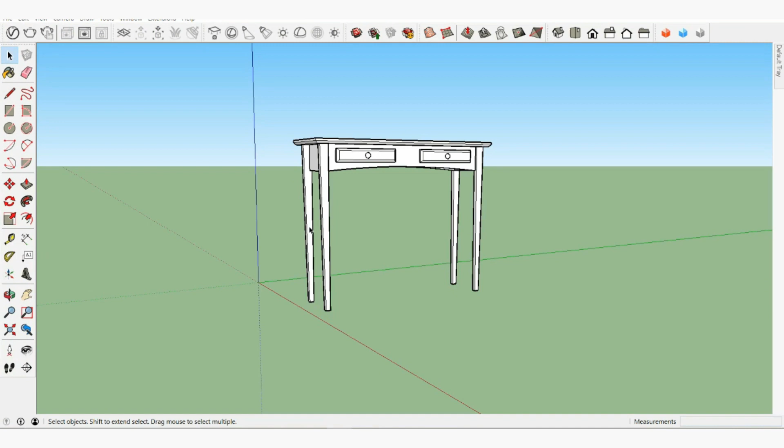In this video, we'll create a hallway table. We'll learn about using groups and components to better separate and organize the various parts of your model.

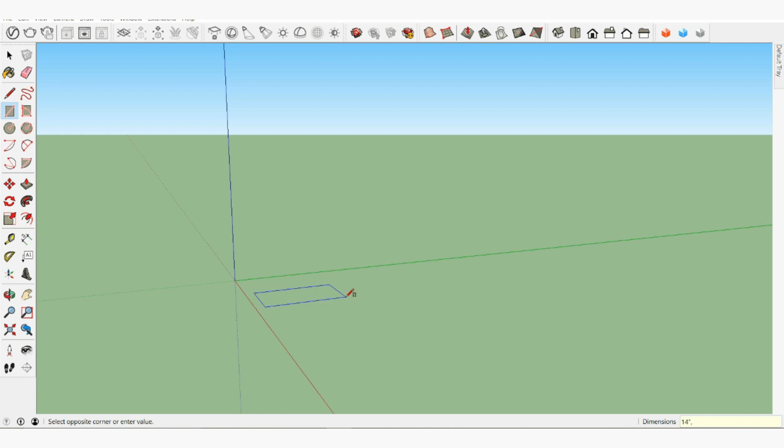We'll start by drawing the tabletop. Create a rectangle that is 14 inches wide by 48 inches long and push-pull it up 1 inch.

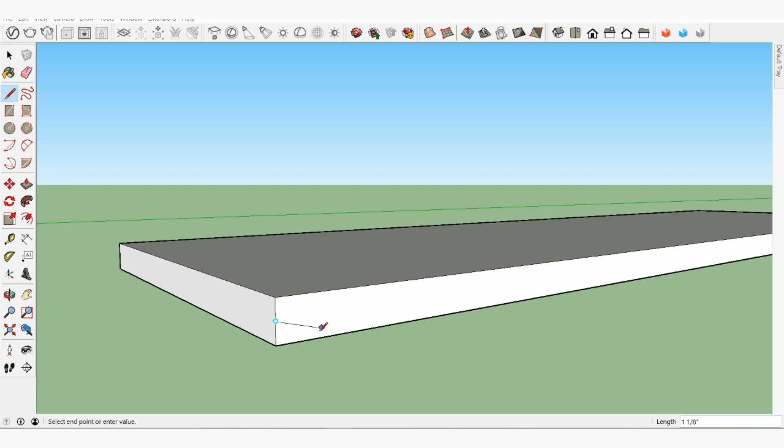Now zoom into the corner and draw a line from this midpoint to a point on the lower edge. Depending on your preference, you can make this angle deeper or more shallow, and SketchUp will give you an indication of an equidistant angle by turning purple and snapping to that angle.

Finish your line and orbit underneath the tabletop. We are going to use the follow me tool to create a chamfer. We could manually follow the surface around the edges, but there is a quicker method. Because we want to chamfer the entire lower surface, we can pre-select that surface, then pick the follow me tool and click on our angle to finish.

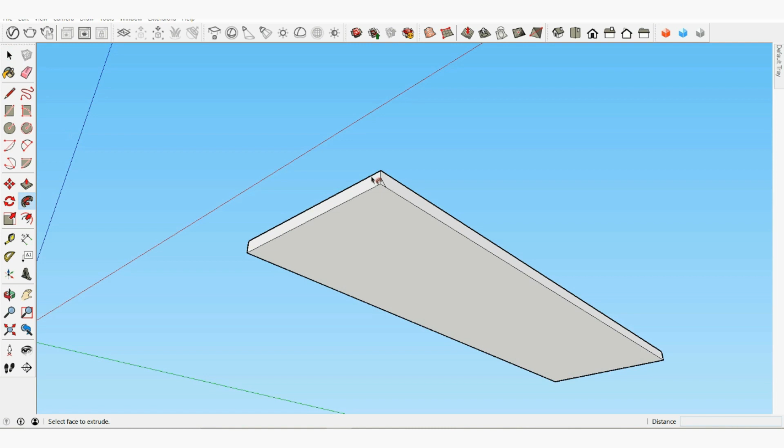Let's move the tabletop up to draw the legs underneath. With the select tool, triple click one of the surfaces to select all connected geometry and move it up in the blue direction 37 inches. Given our top is 1 inch deep, that will give us a total table height of 38 inches.

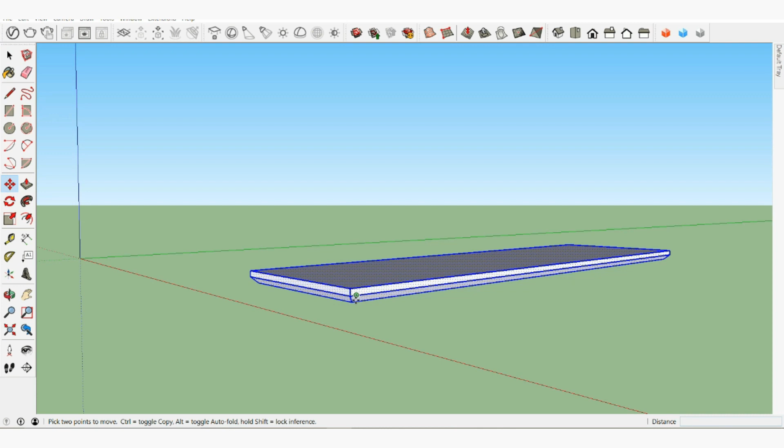Orbit underneath to start drawing the table legs. Draw a rectangle starting from this corner that we could pull into a leg. However, before using push-pull, let's say we change our mind and want the leg inset from the edge instead.

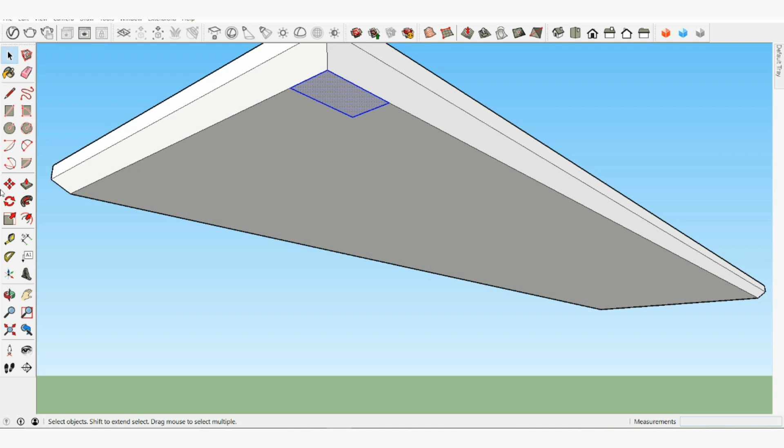If we select and move this surface, however, it begins to warp the tabletop. By drawing it on top of the other edges, those edges merged. This is a key behavior to making SketchUp fast and easy, but it's not what we want in this example.

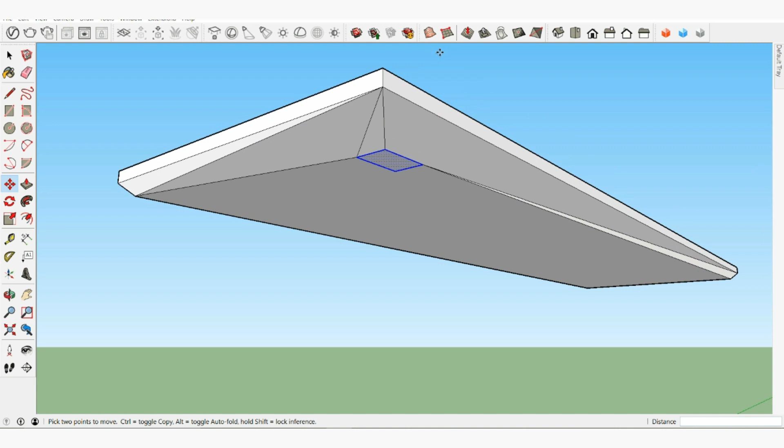This is one of the primary uses of groups, which will isolate our geometry, preventing the edges from merging. To see this in action, undo the rectangle using Ctrl+Z on a PC or Command+Z on a Mac. Then triple click to select the whole tabletop. Right or context click on the top and from the submenu choose Make Group. A new bounding box is shown around the whole top and it now behaves as a single unique entity.

Draw the leg rectangle again, make it 2 inches long, 1 inch deep from the corner, but this time it won't merge with the edges. So if we wanted to move it around, we could easily do so.

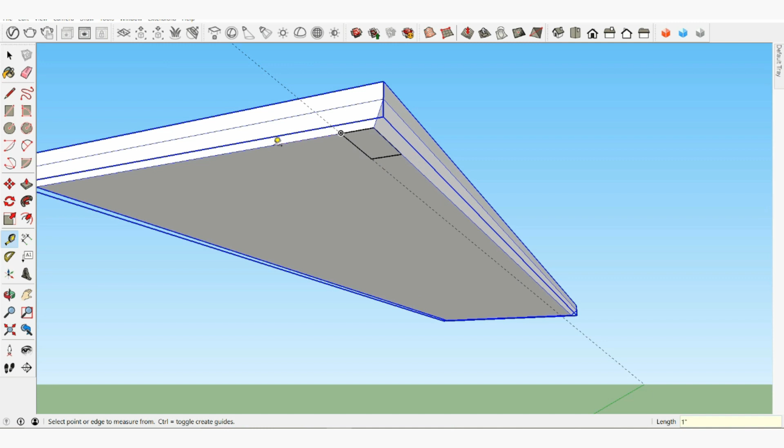Create some guides using the tape measure tool, pulling a guide 1 inch away from these lower edges, then move our leg rectangle to our guides so it's inset exactly 1 inch. Remember to move the rectangle from the corner point for accuracy.

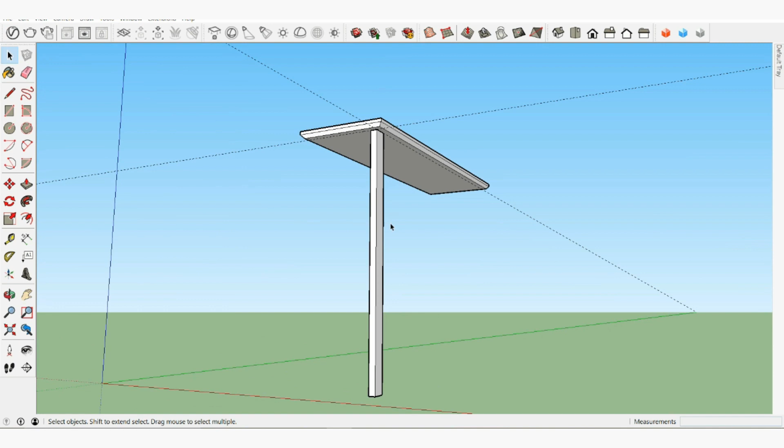Now push-pull the leg down 37 inches. Using the select tool, triple click on the leg to select all of it. Then right click or context click on it to open the context menu, and this time choose Make Component. A pop-up menu will appear. You can name the component and your settings should match these.

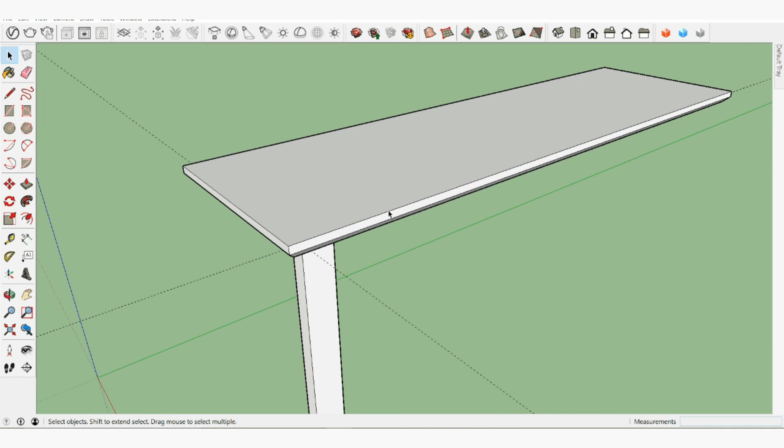We made the tabletop a group and the leg a component. At first, there may not seem to be a difference, but we'll see there is a very important difference. Let's start with the similarities though. A group or a component binds the geometry together into a single entity. You can move, rotate and scale the group as a whole.

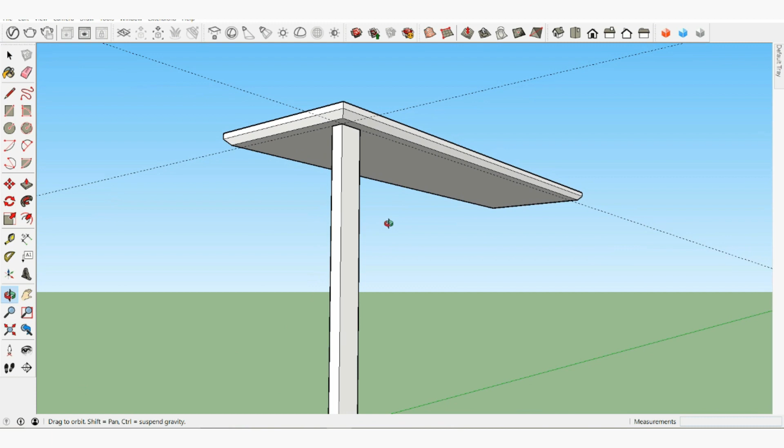However, a tool like push-pull doesn't seem to work because you aren't affecting the actual surface, but the whole group together. To use push-pull and other tools, you need to edit the group. Use the select tool and double click on the tabletop. The bounding box changes, indicating we are now editing the group. Still, with the select tool, click outside of the dotted surrounding box to close the group.

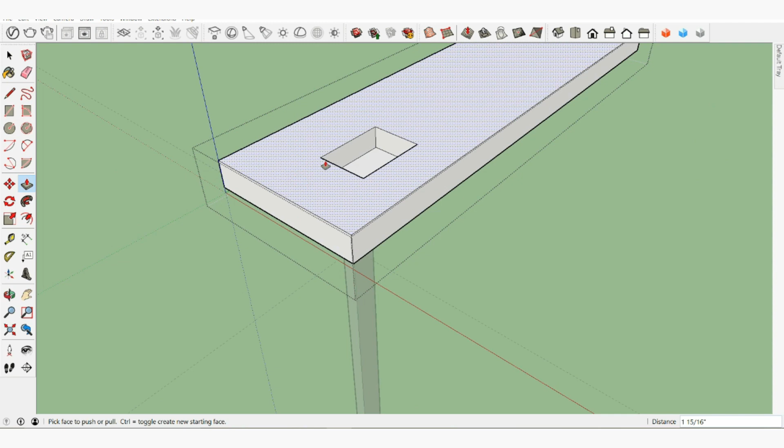Practice this a few times with our group and component. Double click on one to edit it, click outside to close it, and do this several times. While you are editing a group or component, you can draw and divide surfaces and edges, and use push-pull and other tools. But once you close the group, anything you draw is outside of the group, so it's important to know when you are editing or working outside of a group or a component.

With that understanding, if you did modify your group in any way, undo any changes back to our original tabletop and leg, and let's copy the leg to the back side.

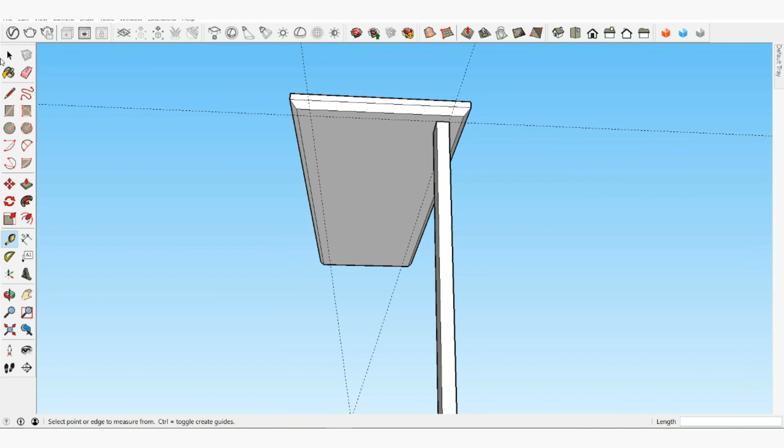First, create a guideline 1 inch away from the back edge. Then, as we learned in the last video, start moving the leg, then press the Control key or Option key on a Mac to move a copy instead. Move the second leg into position using our guidelines.

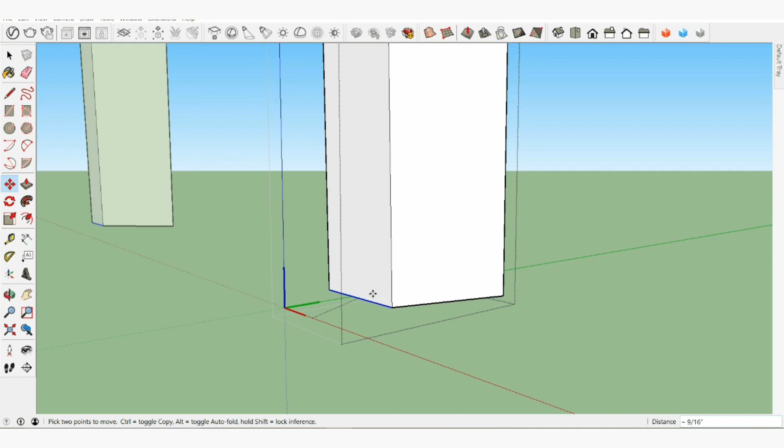For comparison, also make a copy of the tabletop upward so we can see what the primary difference is between groups and components. For the legs, let's angle them inwards as part of the style of our table.

Make sure you are editing the leg component, then select this lower outside edge and start moving it with the move tool. The copied leg component is reflecting the same changes, and this is what makes a component very powerful.

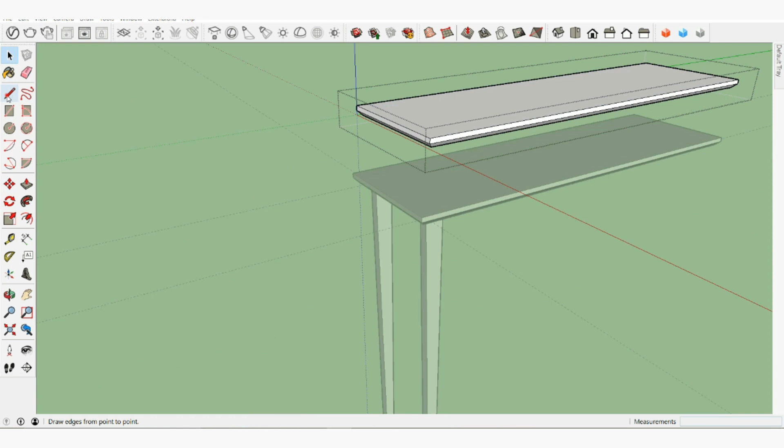Any changes you make to one component are also made to any of the same components in the model. Move the edge inward 1 inch and close the component.

For comparison, edit the copy of the tabletop and make some changes to it. The original tabletop stays the same because this is a group, and every group is unique.

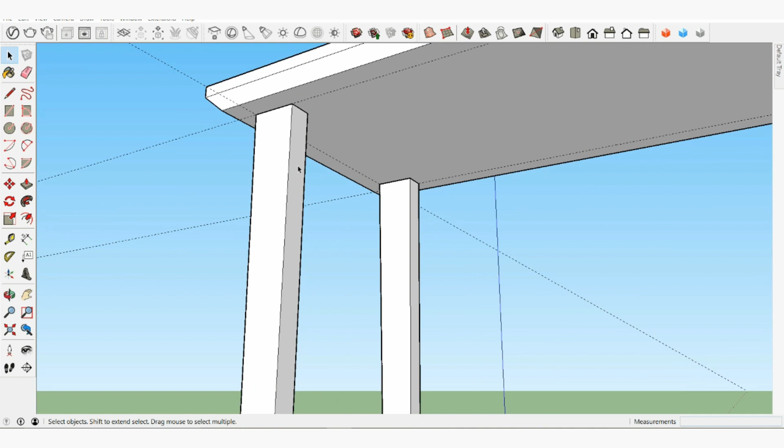So there is our overview of groups and components. Both help us group geometry together, but each group is unique, where a component and any copies of it are instanced, so any changes made to one are made to all. As a general rule, if you don't plan to copy an object, grouping it is fine. But if you think there's a chance it will be copied, make it a component, and use groups and components throughout your model to keep objects separate and unique.

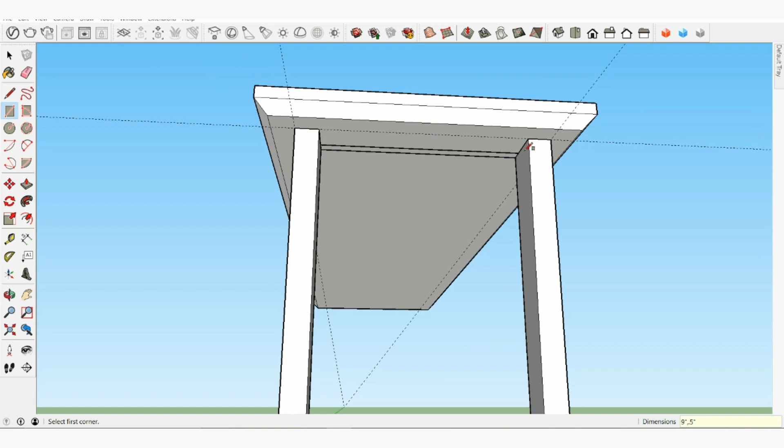Now let's return focus to our table. Navigate under the table and draw a rectangle between the legs that is 1/2 inch thick. Your width may vary based on the angle you created under the tabletop, but whatever the width, pull it down 6 inches. Now triple click with the select tool and make this a component. Name it and create the component.

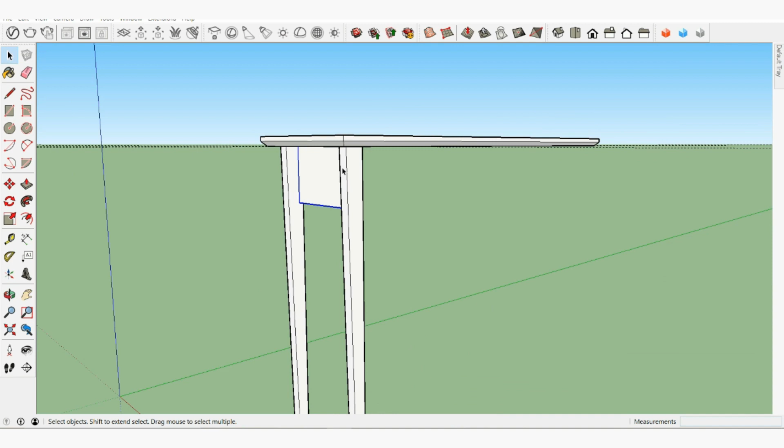Let's copy this support piece and the legs to the opposite side of the table. Zoom out to get a full view of our table, then hold the shift key down and use the select tool to select all three parts. Now begin moving them down the length of the table and press the Ctrl key or Option key on a Mac to make a copy, and place them somewhere around the middle of the table, making sure to keep them lined up along inference directions.

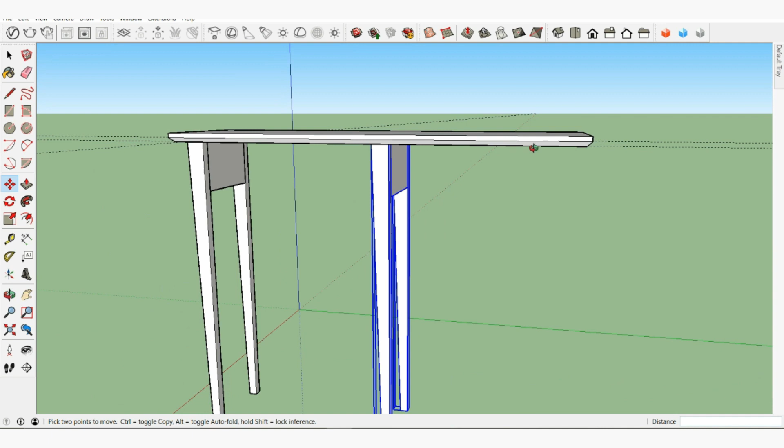To know where to place them, we need to create a guideline as we have done before, 1 inch from the far edge. However, the direction the legs are facing is incorrect. We need to flip or mirror these parts. Make sure all three parts are selected, and choose the scale tool.

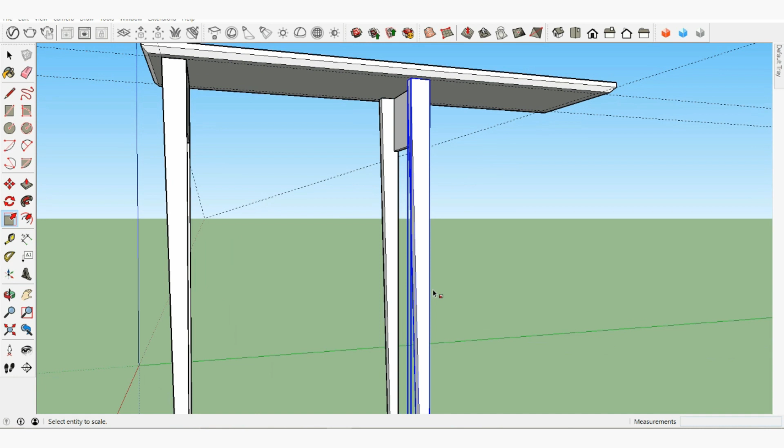Scale works by clicking to move the control grips. Any of the corner grips will scale everything uniformly. However, choosing a center grip will scale it only along that axis. Watch how this works by trying several of these grips. Pay special attention to the center grips, which scale along the red, green and blue directions.

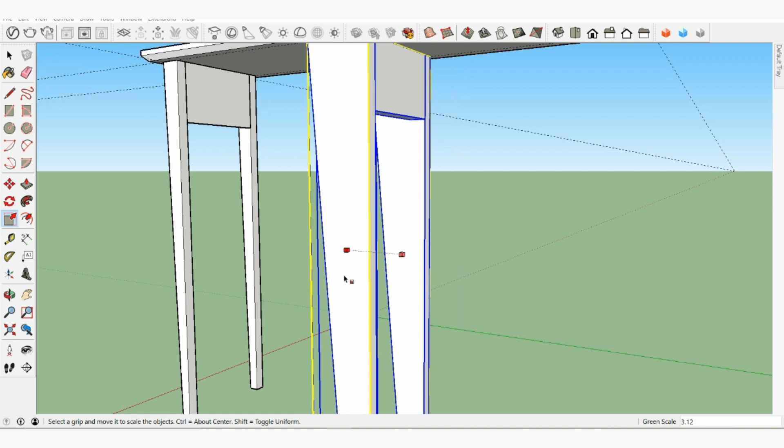If you squash the geometry through itself, you can mirror the object in that direction. To get a perfect mirrored version, watch the measurements box. The scale tool works as a percentage: 1 equals 100%, 0.5 is 50% or half the scale, 2 would be 200% or twice the scale. And if we pull the geometry through itself, it becomes negative. So -1 equals -100%, or a perfect mirrored version of our geometry.

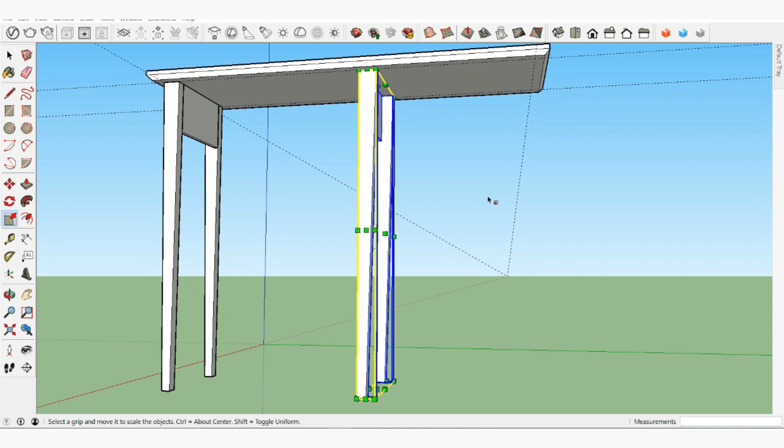Undo any scale changes you have created. Select all three parts and scale along this center grip until you see -1, which the tool will also snap to, and click to finish. Now move the assembly into place using the corner of the table and your guidelines for placement.

Now let's create the front of the table. Zoom into a corner to draw a rectangle that is 1/2 inch wide by 6 inches deep, then pull it across using the opposite leg as a reference.

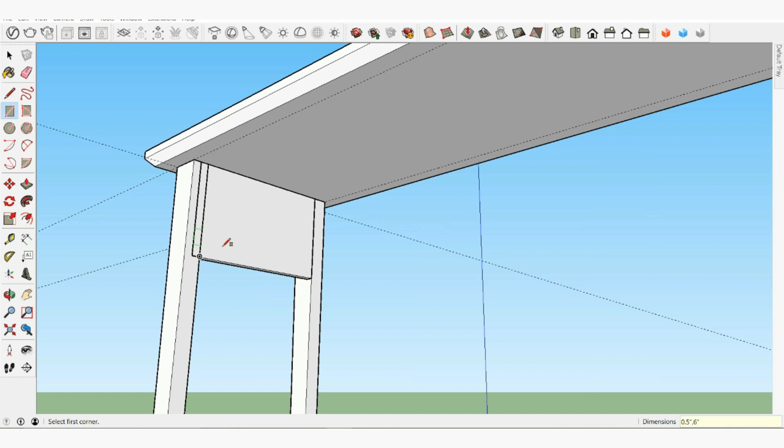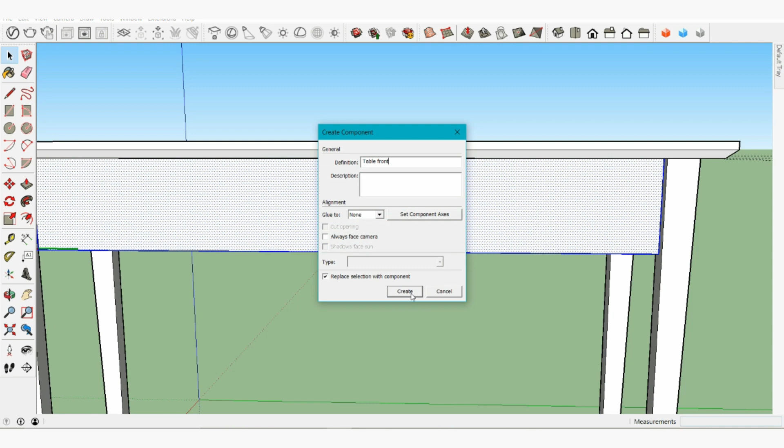Select the entire table front with a triple click and make it a component. Now orbit underneath and copy this to the back using inferencing for proper placement.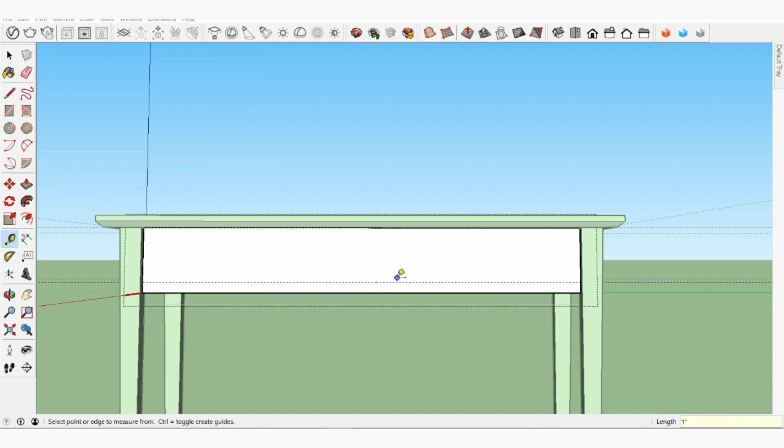Let's add a curve to our table now. Orbit to a good front view and create a guide 1 inch up from the table front piece. Now edit the front component to draw a 2-point arc inside it. Drawing an arc is a simple 3-click process: click once at the corner to start the arc, click on the opposite corner where the other side of the arc will be, then pull up and use the guidelines as a reference for how high to make the arc.

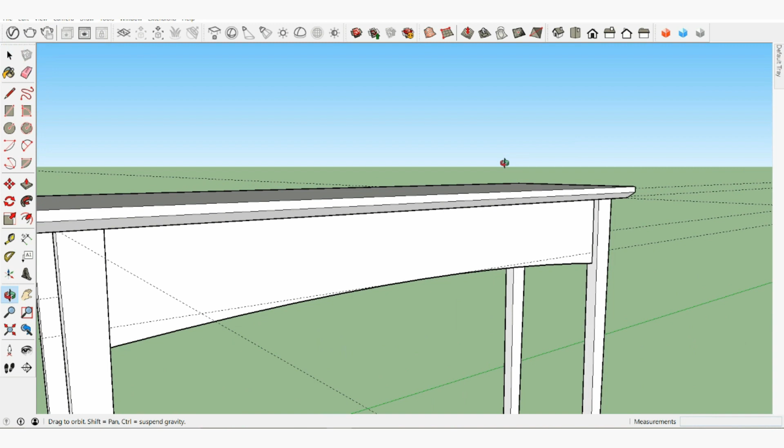Now you can use push-pull on the arc. Push until it meets the back surface, which will delete it. Close the component. We won't create all the internal elements or drawers that a real table would have, but let's finish this example by creating the drawer fronts so our table looks complete.

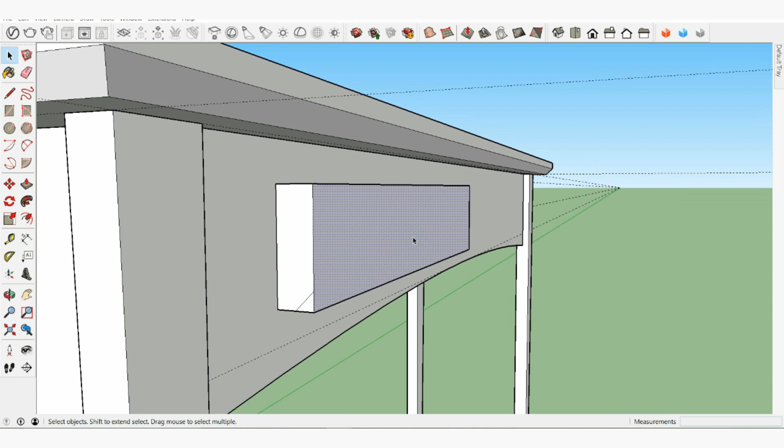Draw a rectangle on the table front that is 3 inches by 15 inches wide and pull it out an inch. Zoom in and create a chamfer as we did with the tabletop. Draw an angle, then select the front face as our follow me surface. Then choose the follow me tool and click on the angle to complete the follow me chamfer.

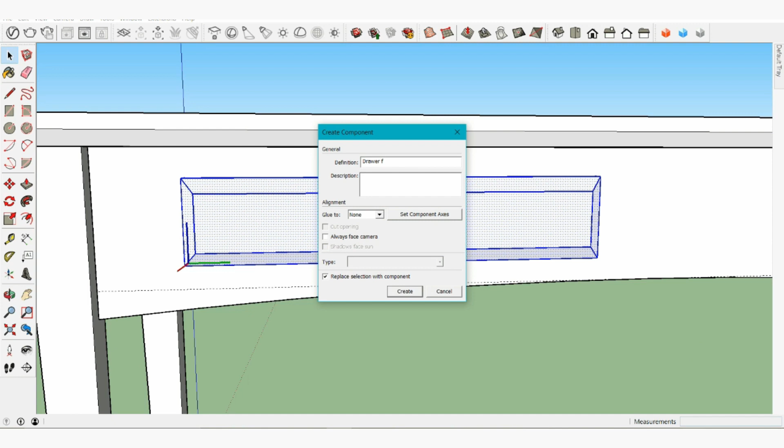We better group the geometry at this point. Triple click to select it all. And if we were going to center the drawer and have only one, we could group it, but I'm going to create two drawers, so let's make it a component instead.

Now a few guidelines can help you with placement of the drawer front and the copy. Place yours where you think they look best. Perhaps as a final touch, edit one of these drawers and, using inferencing to center our circle tool, create a small drawer pull, then close the component.

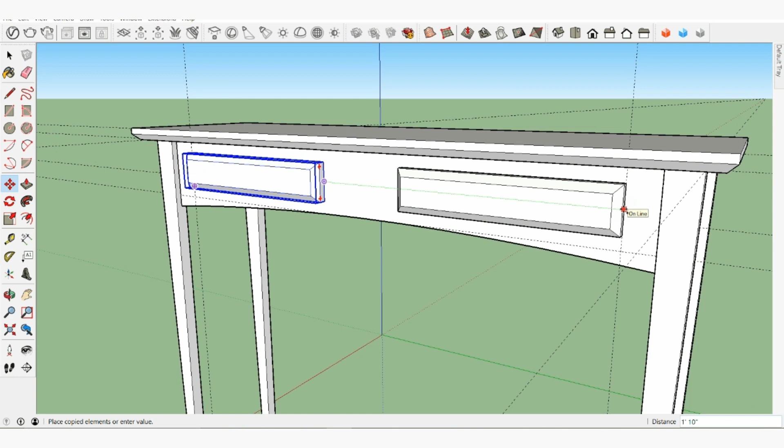Delete any guides we have created, paint the table if you like, or add your own details. The very best thing you can do is to just practice and play with SketchUp, using these projects we have built together or new projects of our own.

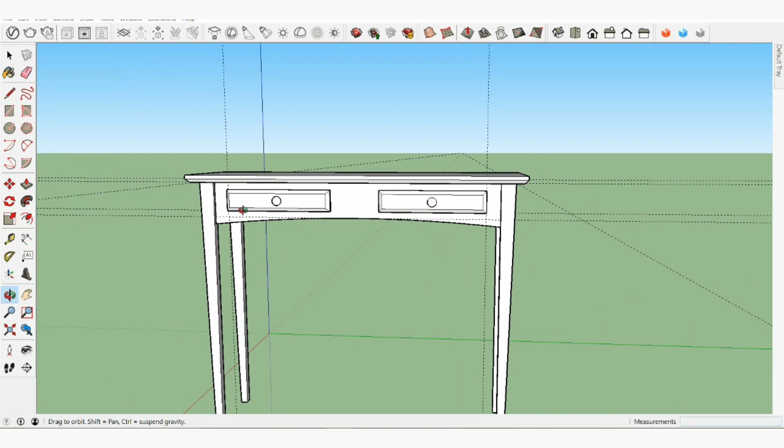As with previous videos, there is much more to learn about using groups and components, mirroring objects, follow me, and other powerful tools in SketchUp. So please continue to explore more of our videos and training content.